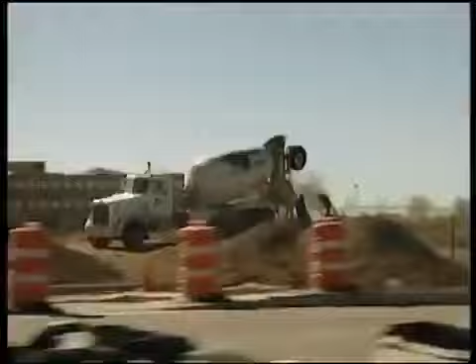We're living in a time of great change and great challenges. The human population has grown by over 75 million in the past year, and the increase is greater each year. There is an enormous challenge to provide safe drinking water, and an enormous challenge to purify the wastewater generated by the world's ever-expanding human population. How can we meet these challenges?

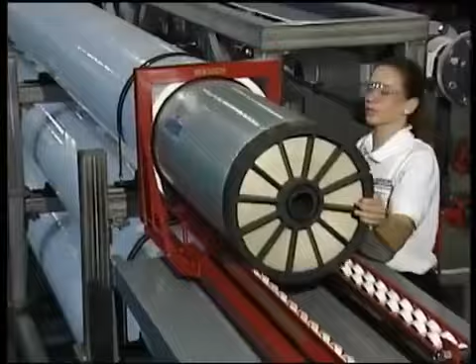One company stands above the rest in creating the technologies and products needed to solve these challenges. My name is David Koch, and I'm the president of Koch Membrane Systems. For almost 40 years, KMS has been a leader in developing new membrane technology, liquid filtration in many different industries. Over the years, we have grown to a size approaching $100 million per year in sales and 500 employees.

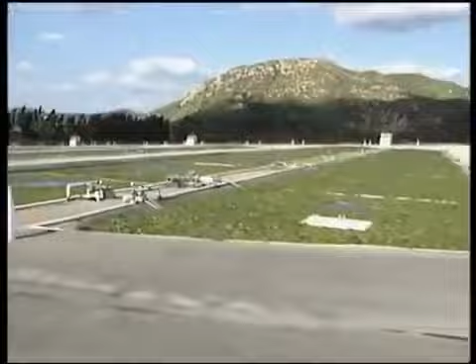In the mid-1990s, we identified water and wastewater treatment as a key growth area and invested accordingly, both through in-house research and development and through acquisition. KMS has a long history of providing innovative and highly economical products for water and wastewater treatment.

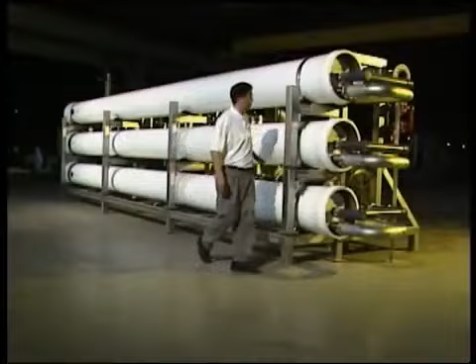For example, we recently introduced the Mega Magnum reverse osmosis element, which significantly reduces the cost of providing purified, desalinated water. Our hollow fiber ultrafiltration membranes, developed some years ago, treat raw water to provide safe drinking water and are also used to polish industrial wastewater for reuse.

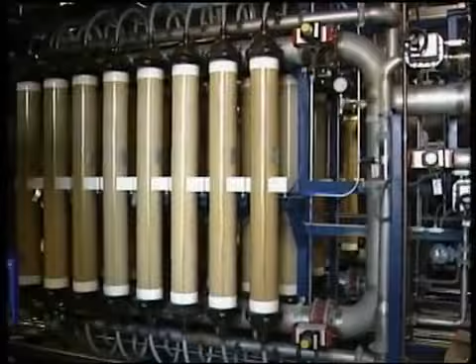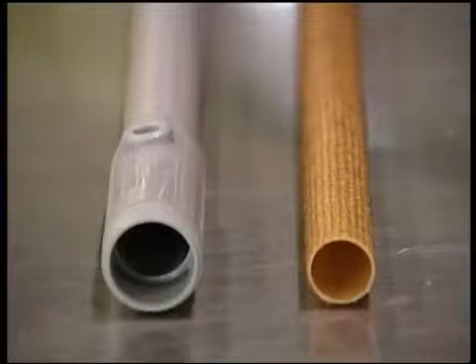KMS's well-proven tubular membranes are the membranes of choice for many challenging industrial wastewater applications. Since the 1970s, our tubular modules have been used in membrane bioreactors, or MBRs, to treat domestic waste from schools, office buildings, and shopping malls. We've also supplied tubular MBR membranes for landfill leachate treatment.

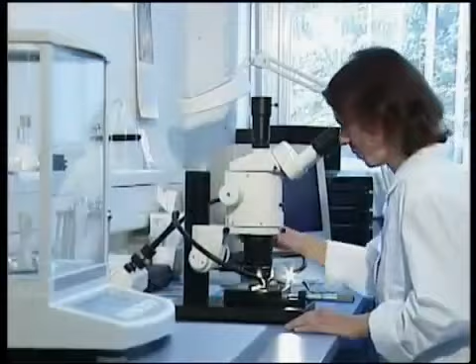To meet this need, in late 2004, KMS acquired PURON, a young company based in Aachen, Germany. PURON was founded in 2001 by engineers associated with the University of Aachen, which is known for its development of membrane technology. In PURON, we found a company that has huge synergies with KMS.

The PURON technology is outstanding. It uses a submerged hollow fiber membrane module whose design is protected by a large number of worldwide patents. I believe it offers major advantages over other products in the market today. As will be explained in the film which follows, the PURON single header module design is much less subject to plugging and fiber breakage and uses far less energy than the double header designs. It is a proven concept with many commercial systems operating successfully.

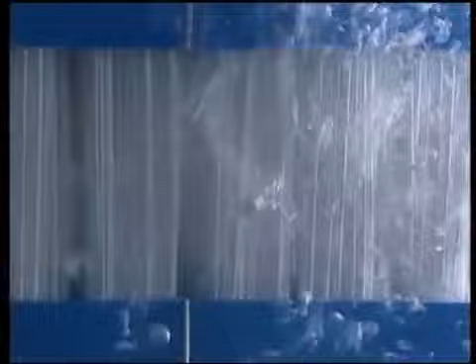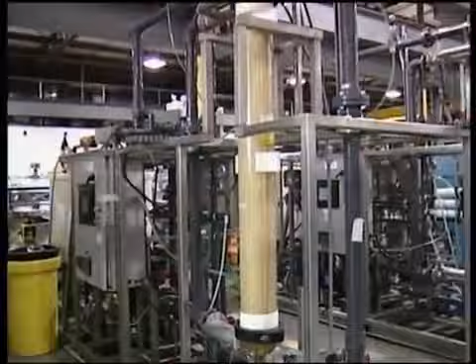With the PURON MBR product for wastewater treatment, the Mega Magnum RO element for saltwater desalination, and a hollow fiber ultrafiltration cartridge for raw water purification, KMS is the only filtration company in the world with a full range of membrane products for municipal and industrial water and wastewater treatment needs.

Our sales force is fully trained to discuss the performance of all of these products. We hope that you will enjoy this film, which explains the many benefits of the PURON technology and shows why we believe it is certainly the most advanced and economical technology for purifying municipal and industrial wastewater.

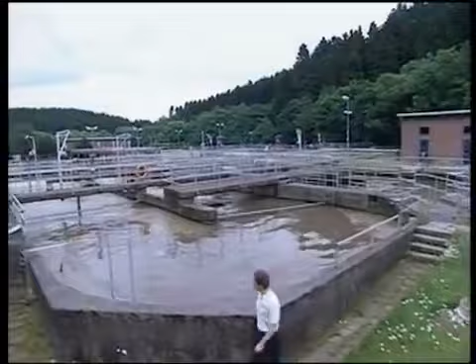Wastewater treatment needs are enormous. Wastewater treatment will play an incredibly important role in accommodating future water demand. Conventional wastewater treatment consists of 3 steps: primary treatment, biological treatment, and solids-liquid separation.

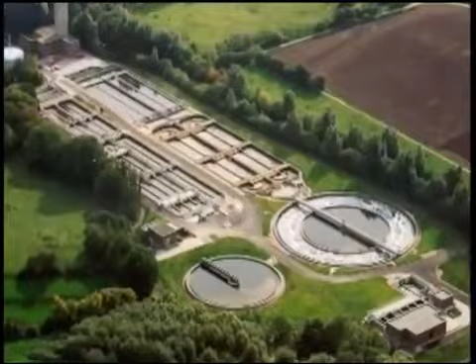The crucial part of the process is the solids-liquid separation. With a conventional sedimentation process, there is often insufficient removal of bacteria and suspended solids. For example, in 1 liter of typical secondary effluent, there are 10 million bacteria, which can be difficult to remove.

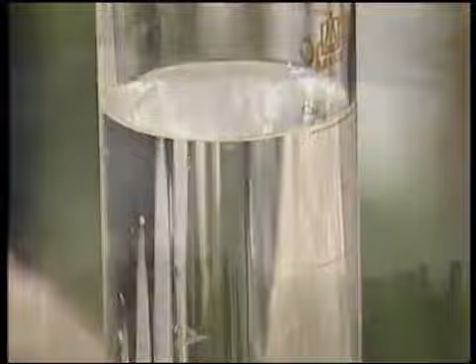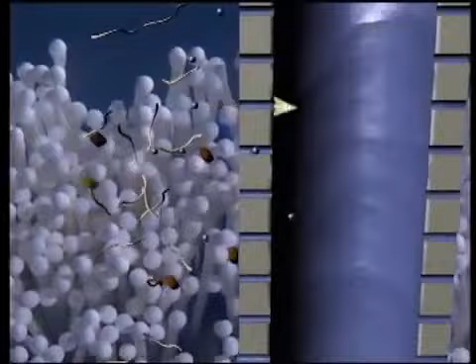The solution is here. Membrane technology has led to a new revolutionary concept in wastewater treatment. Membranes act as a barrier to bacteria and suspended solids to produce a low turbidity water with very low bacteria counts. Membrane bioreactors, simply called MBRs, offer the optimum solution.

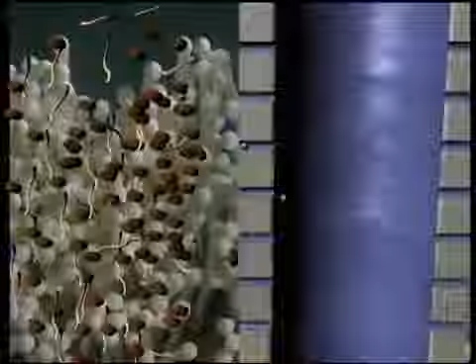The membrane modules are submerged in the activated sludge to combine the biological step and the solids liquid separation into a single process. Since the membrane acts as a barrier, this improves the effluent quality.

Also, the membrane barrier eliminates the secondary clarifier and allows the activated sludge to be more concentrated. This reduces the volume requirement for biological tanks, thus saving space and money. When compared to conventional wastewater treatment, it's clear that MBR treatment is far superior.

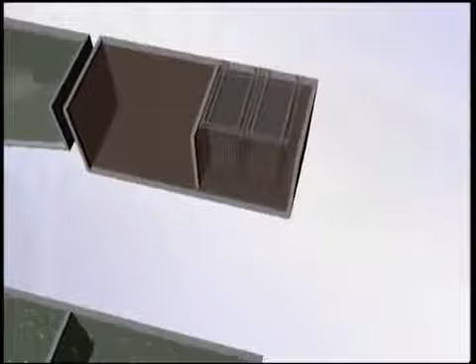Due to the tough environment in which the membranes are operated, membrane module design is of the utmost importance for successful operation of the MBR. The membranes extract clean water from the sludge, leading to dewatering of the activated sludge around the membrane module. This concentrates the solids surrounding the module and can lead to plugging of the module.

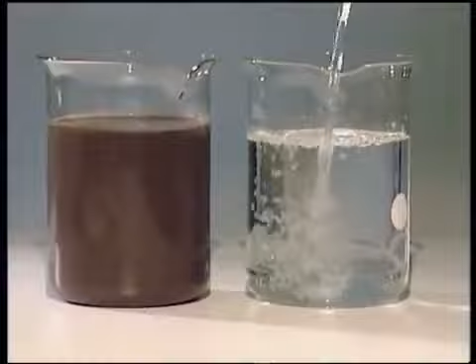An important feature of a good MBR system is a reliable method of flushing the solid matter out of the module to avoid clogging and sludging problems. Additionally, the module design needs to be able to handle hairs and fibrous material.

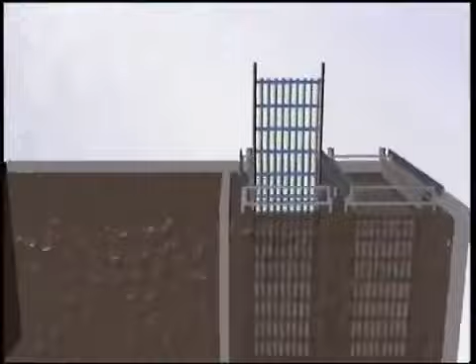The PURON MBR solution, naturally. The PURON MBR technology consists of hollow fiber membranes arranged in bundles. After biological treatment, the treated water passes from the outside of the fibers to the inside. The membrane, with a pore size of approximately 0.05 micron, provides a barrier to suspended solids, including bacteria.

The fibers are fixed only at the bottom and can move freely along their entire length. The top ends of the fibers are sealed.

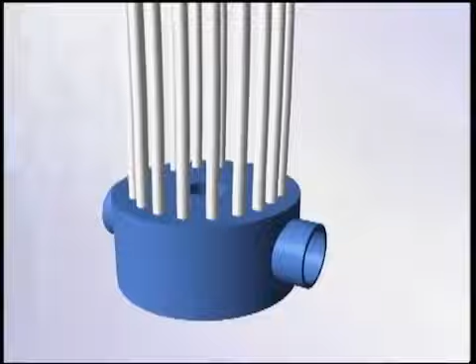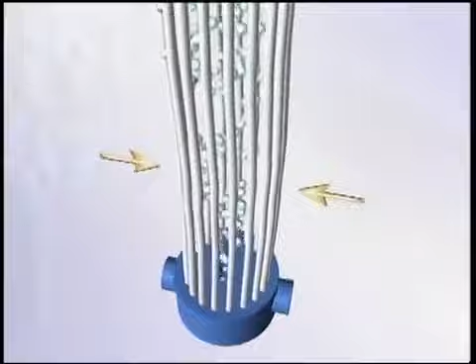During normal operation, a vacuum is applied to the bottom of the bundles and water is sucked through the wall of the membrane. The solids remain on the outside of the module and clean water is drawn out through the inside of the hollow fibers into a single header. Aeration at the center of each bundle ensures that all solids, such as hairs, fibrous material, and sludge, are flushed out of the module.

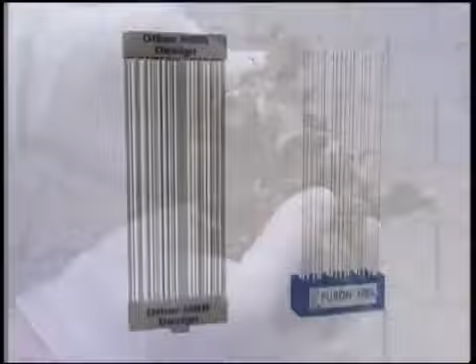PURON MBR technology solves the problem of clogging. Hairs and fibrous material can be a big problem for other MBR designs, especially for hollow fiber modules that use a double header design. Double header modules have a serious disadvantage in comparison with the PURON design.

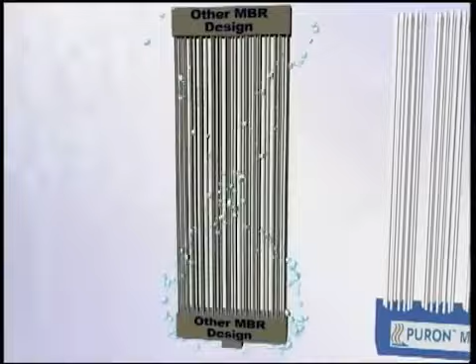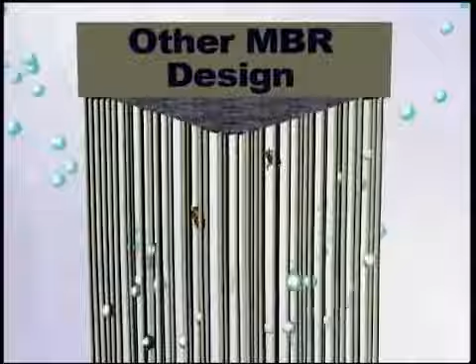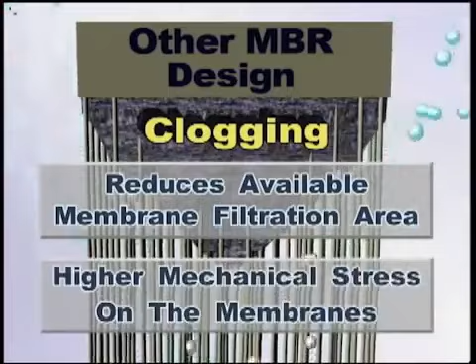When hairs and fibrous material within the sludge enter the membrane module, they float to the top due to the air scouring. The upper header acts like a barrier or screen, leading to clogging. This reduces available membrane filtration area, which affects system performance. Additionally, the clogging leads to higher mechanical stress on the membranes, which causes damage and will shorten membrane life.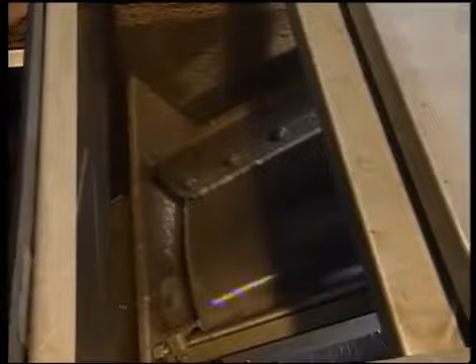To minimize these issues, double header products require very fine pre-screening, leading to higher capital and operating costs.

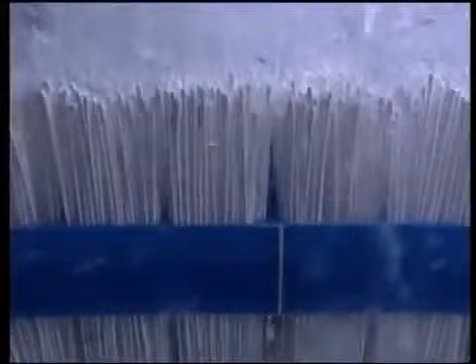PURON technology provides a simple solution: the single header design. The PURON single header allows hairs, sludge, and fibrous material to be easily removed from the top of the module by simple intermittent air scouring, eliminating the risk of clogging.

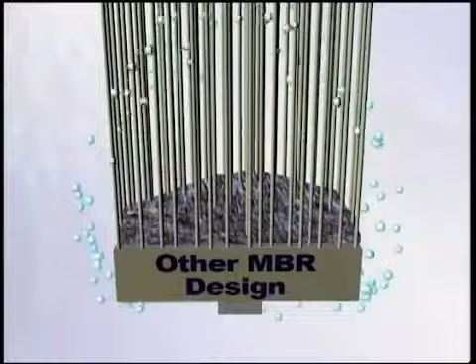What about sludging problems? Another issue with many MBR modules is sludging. Sludging occurs in dead zones where the air does not reach the membranes. This is often the case for double header modules, as they mostly supply the air from below the bottom header.

When the air is supplied below the bottom header, much of the air bubbles around the outside of the membrane module and does not reach the interior fibers of the module. This allows sludge to settle, leading to fouling and sludging of the module.

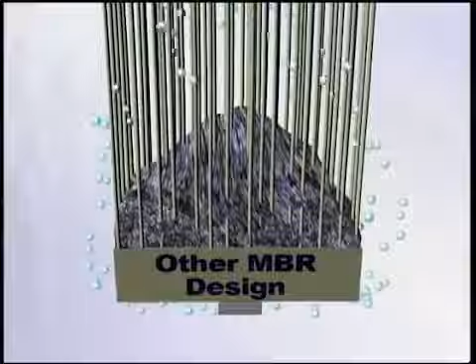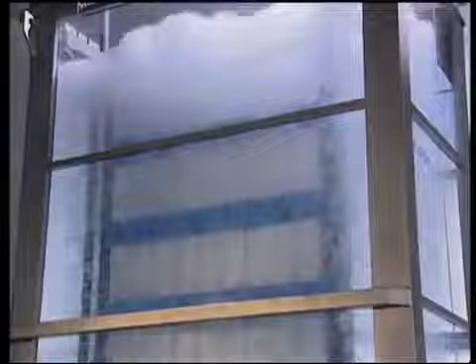A unique way to combat this issue is the central aeration system of the PURON technology. Central aeration injects the air in the middle of the fiber bundles, right where it is needed to avoid sludging. In summary, the unique single header and central aeration in PURON modules, patented by KMS, allow for reliable, trouble-free operation.

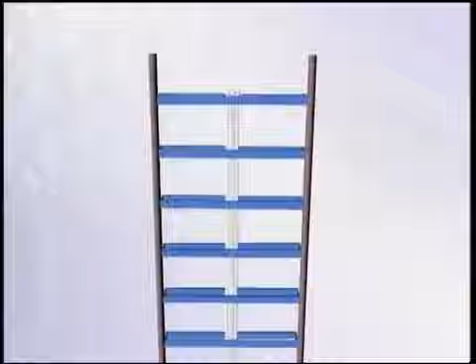The individual fiber bundles are incorporated into a simple modular design to create the full-scale membrane module. The bundles are arranged in rows, with the bottom headers being connected together. Several rows are then mounted in a stainless steel frame to create the module.

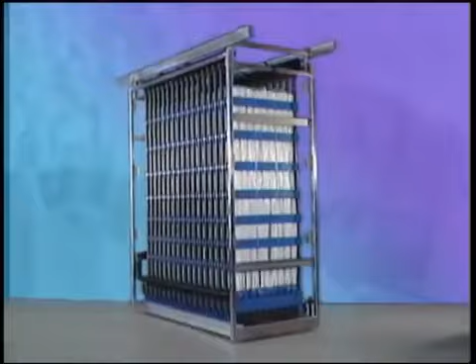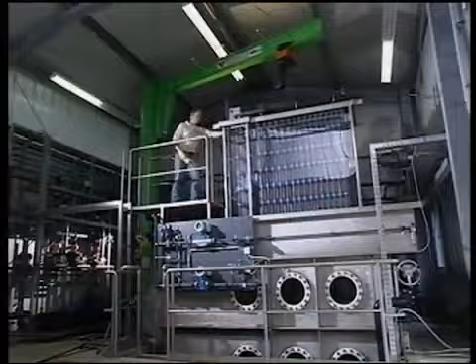The PURON modules can be submerged right into the biological treatment tank below the liquid level, or they can be placed in a separate membrane tank. The advantage of a separate membrane tank is that the biological process and the membrane process can be optimized individually. The mixed liquor is recirculated back from the membrane chamber to the aerobic or anoxic zones of the biological process.

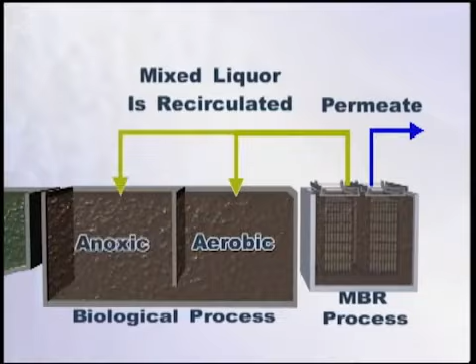At the municipal wastewater treatment plant in Simmerath, Germany, a PURON MBR system has been in operation since 2003. The system performance is excellent, and the membranes are still in perfect condition.

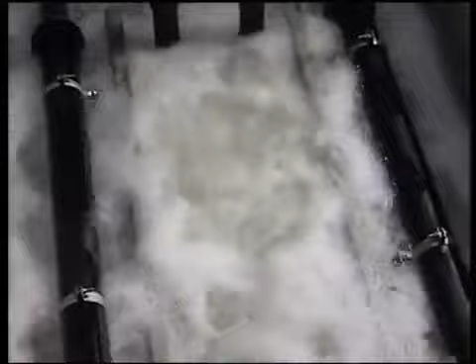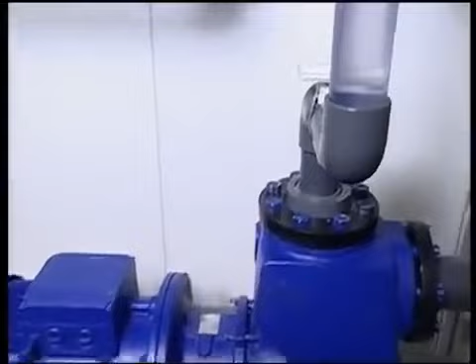It's easy to see that the PURON MBR technology has many advantages. High effluent quality: PURON MBR effluent is very high quality and meets strict discharge regulations and can be reused for industrial applications, irrigation, or even as a step in a potable reuse scheme.

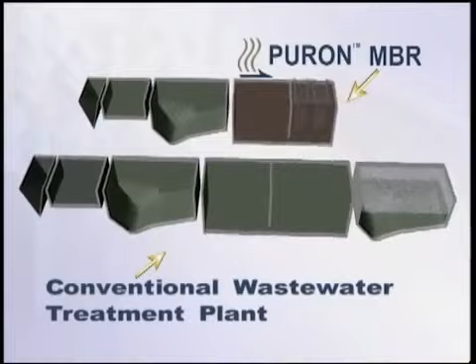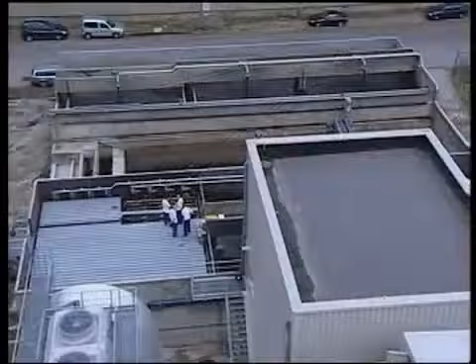Small footprint: PURON MBR systems need only about half the footprint of a conventional wastewater treatment plant. This provides a great capital cost savings, whether for a plant upgrade, a plant expansion, or for a new plant. The capacity of an existing plant, for example, can be increased without requiring additional footprint.

Long membrane life: The PURON hollow fiber membranes are reinforced with a multitude of very fine, solid fibers woven into a hollow tubular configuration. The membrane is then cast onto this structure, which makes the membrane extremely strong and gives it a very long membrane life. Automotive tires are reinforced in a similar manner to give them the extraordinary strength and lifetime that they enjoy.

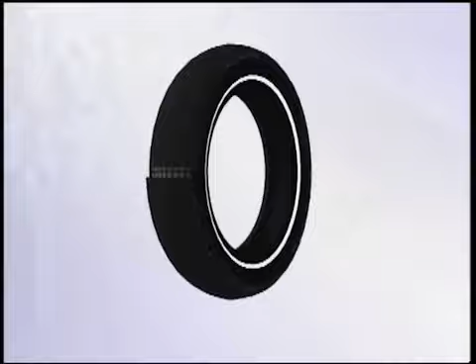Low energy consumption: Central aeration optimizes air usage by putting the air where it is needed. This dramatically lowers the energy needed for air scouring by as much as 25 to 50% of the energy required for other MBR modules. High and stable flux.

The PURON single header design results in reliable operation at high and stable flux rates. Simple pre-screening reduces investment costs. The PURON single header design and central aeration allows for selection of economical types of pre-screen.

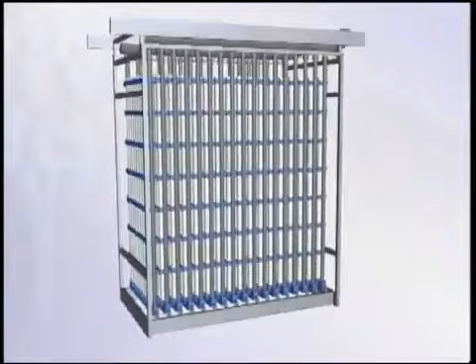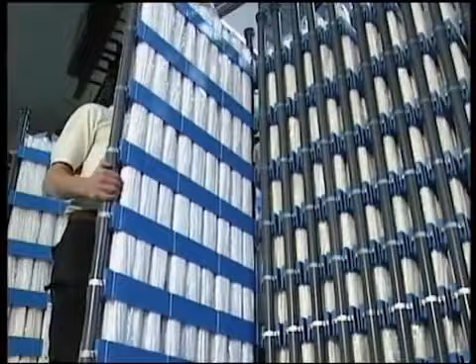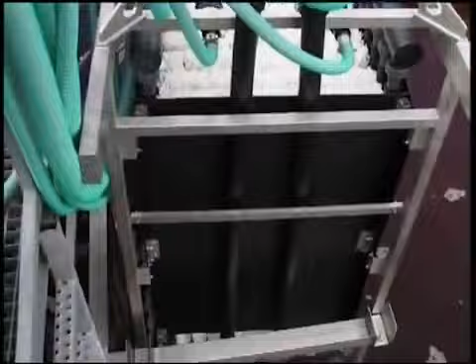The best choice for any MBR application. PURON MBR modules are the best choice in any MBR application. They are available in standard sizes of 235 square meters and 500 square meters, or can be customized to retrofit any existing conventional system. If a customer is dissatisfied with his existing MBR modules, the improved PURON design can also be used to retrofit earlier generation double-header systems to improve operating costs and reliability.

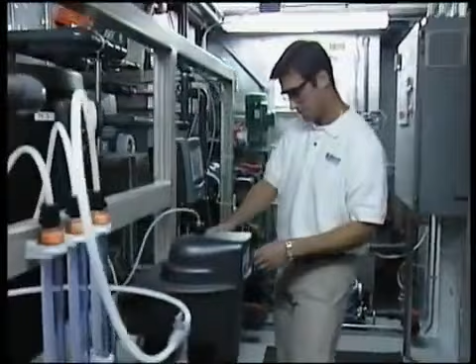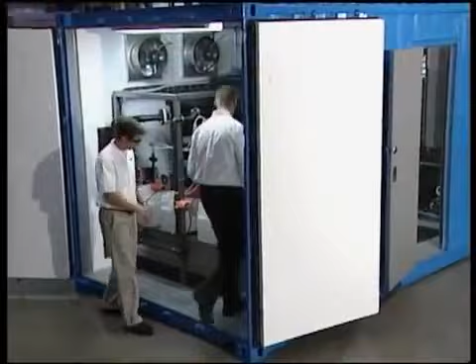Successful MBR operation not only relies on module design, but also on system design and operational concepts. KMS therefore not only offers PURON MBR membrane modules, but also associated components and a complete engineering package for the design and construction of an MBR system. If pilot testing is required, one of KMS's many high-quality, fully instrumented, fully automated pilot units is available for rental.

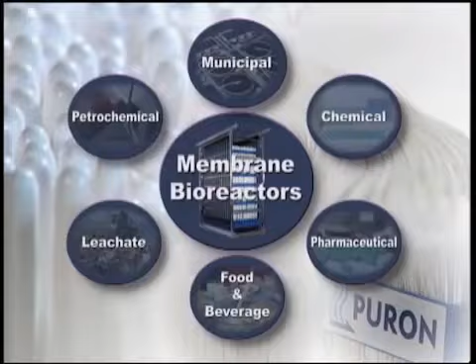MBR is used in many industries, not only for municipal wastewater. PURON MBR solves many problems in industry, especially where large amounts of water are used and reuse is required, or where space is limited. For example, the Sobelgra malting company in Belgium needed to double production, but they did not have the space to double conventional wastewater treatment.

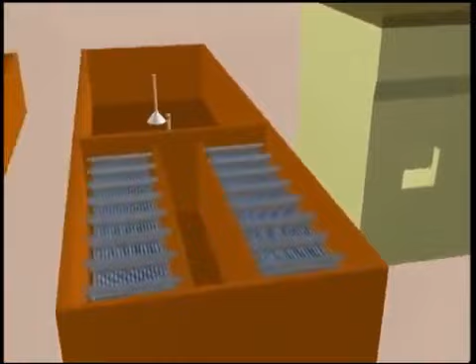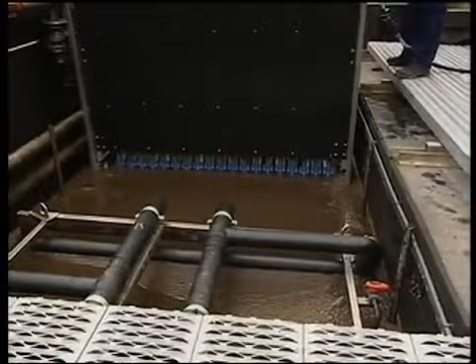The installed MBR system treats 2,000 cubic meters per day with 16 PURON modules, a total of 8,000 square meters of membrane area. This PURON MBR was commissioned in November 2004. Not only did the PURON MBR system meet production needs, but produced water that was over 10 times better than the effluent produced with the old conventional plant.

MBR passes stringent regulations. There is a tremendous need for the PURON MBR technology. The need to treat wastewater to protect our freshwater supply and to recover water for reuse grows daily.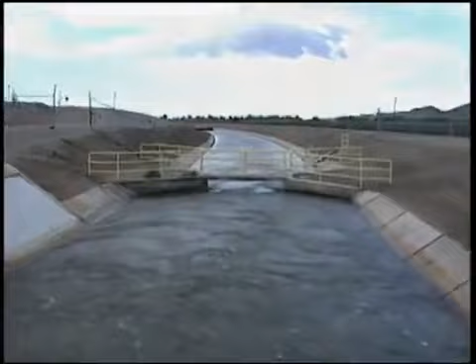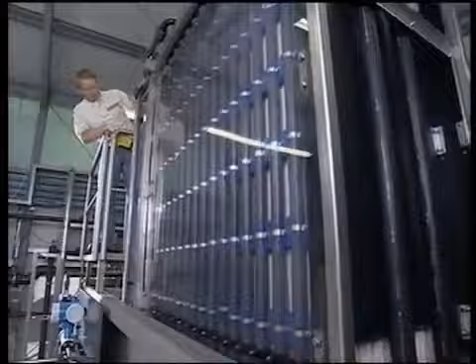PURON MBR technology from Koch Membrane Systems is here to help you solve all your wastewater treatment challenges. Koch Membrane Systems has sales and service offices worldwide to support MBR applications. PURON MBR technology: the solution is here.